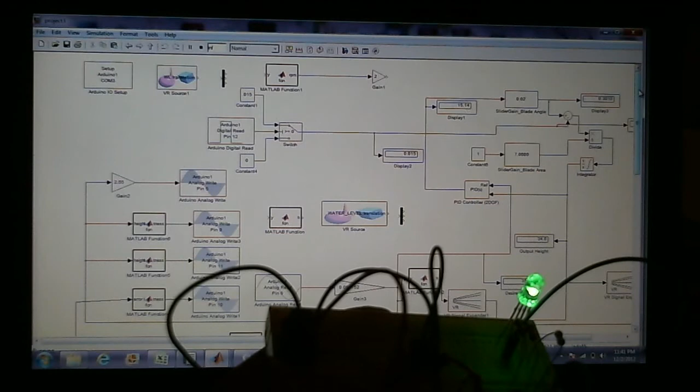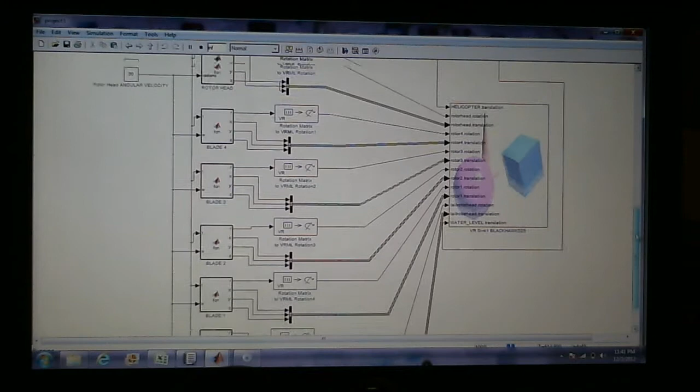Okay, here we have project 3. It's a continuation of project 2. Much of it is the same. Here we have our PID with slight modifications to it. We have our VRML world, 3D world here. That's largely unmodified. And of course we have the meat of project 3 here, which is the Arduino setup, the Arduino on the breadboard.

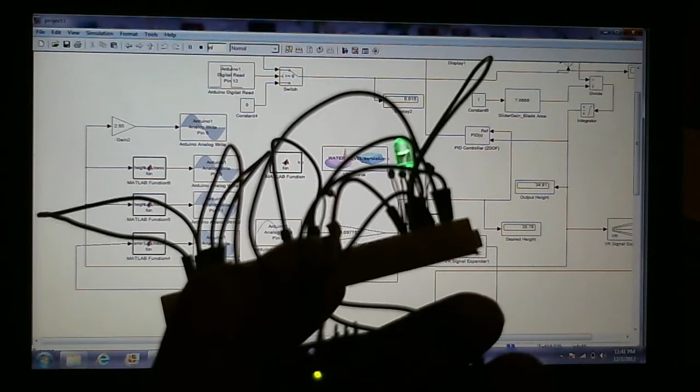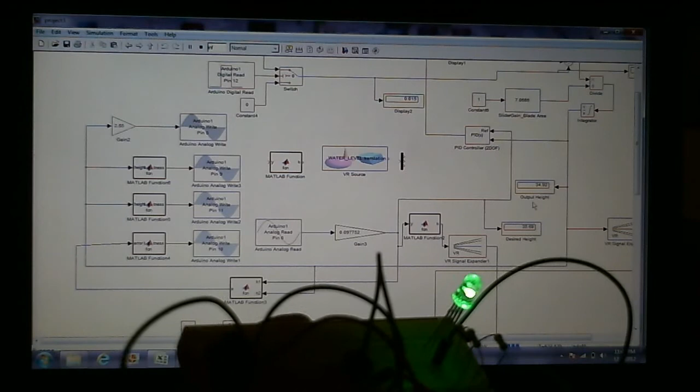So I'll start with the PID. For the PID, we added this analog read from pin 0. So we set up our Arduino with pin 0. That's an analog read, and based on that read, which is connected to this pot right here, we can go from 0 to 100. That's our height, and we have it here, desired height. And you can see right now the light is green, which means that this desired height and output height are about the same. There's a small error in it, so the less the error, the brighter the light turns. I'll show that in a moment here.

Here we have our 3 for the RGB light. We did an analog write instead of a digital write. So with this we can control the brightness of the lights instead of just being on and off. So for this one, I believe this is the error. So as it gets closer than a difference of 3 in height, it starts getting brighter and brighter green as the error gets lower.

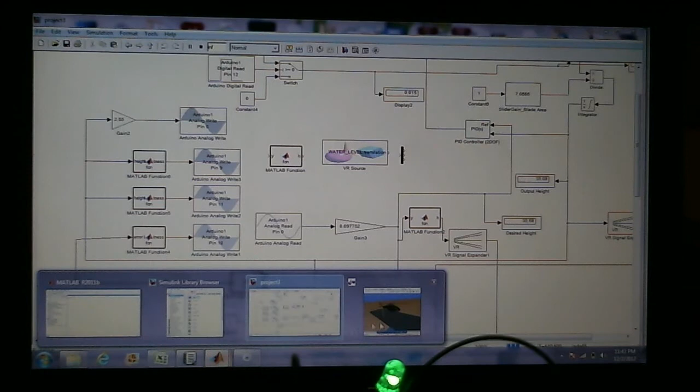The other light is red, so if it goes past 90, it turns red, and as it gets closer to 100, it gets brighter and brighter for the overflow. And for when it's critically low, when it hits 10, the light turns blue, and it gets brighter and brighter as it goes to 0. So I'm gonna show it here. Let me see. I got the helicopter going here.

So now we're gonna adjust the height. Right now it's at 35. It's pretty bright. So if I go, let's say 40, okay, we went 39. Since the error is larger than 3, the light is off. So now it's slowly getting up there. Now it's at 36. So once it gets to about 37, it's gonna light up. So now it's getting closer to the desired height, and it's getting brighter and brighter. That means that the error is decreasing. So the brighter the light is, the less the error.

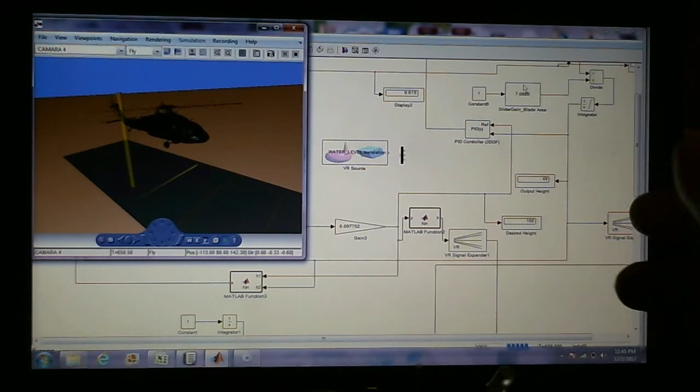So now we go to the next color, which is red, and that happens when it reaches 90. So let me put this at 90. So now it's brighter. As it gets closer to the desired height, it's getting brighter and brighter. So now when I change it, my desired height, I just put it at 100 for now. So the desired height is 100, and since the difference is more than 3 right now, it's at 47, the light is off. So we gotta wait here. It's taking a while for it to reach the height, but you can see it's going up there. If you can see the line here and the aircraft, the gap is getting bigger, so it's going up.

So now it's at 64. It takes a while for it to get up there, so we're just waiting here. I thought it went up higher than that. I don't know. Taking his time getting up there. He's getting up there slowly. 82.

Oh, this is simulating a tank being filled up with water more than what it is. A helicopter going up 100 meters, that's pretty damn slow for a helicopter.

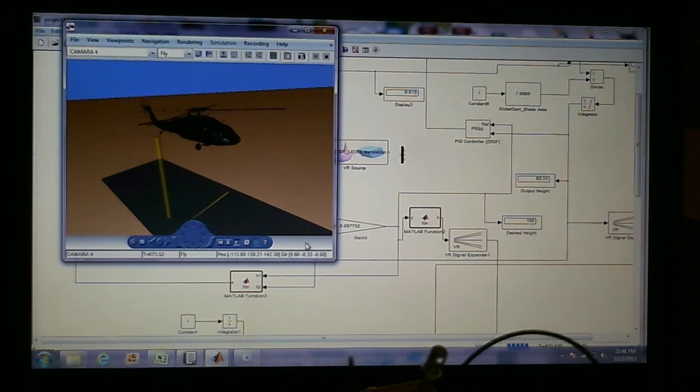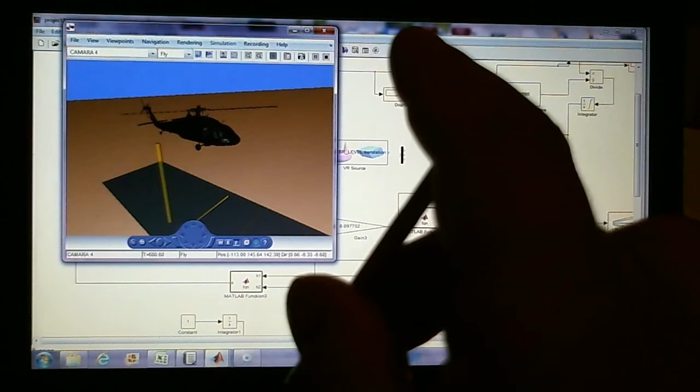Yeah, so now it hit 90. The height is 90. So above 90, it's getting brighter and brighter as it goes to 100. I'm gonna adjust this. I'll put it at 98. Actually 95. So at 95, it went green because the error got small, but it's also red because of the overflow. Yeah, so now the desired height is 92, but the output is 96. It just turned red.

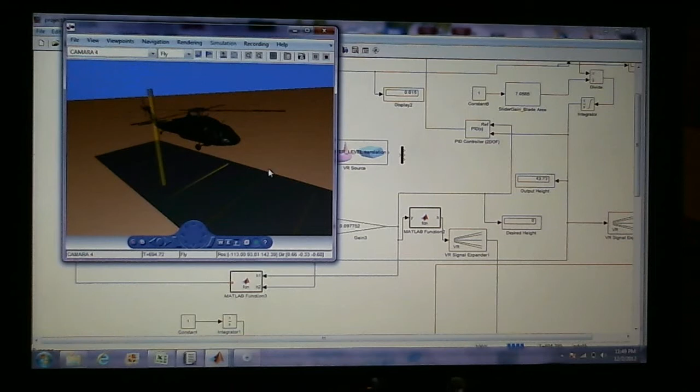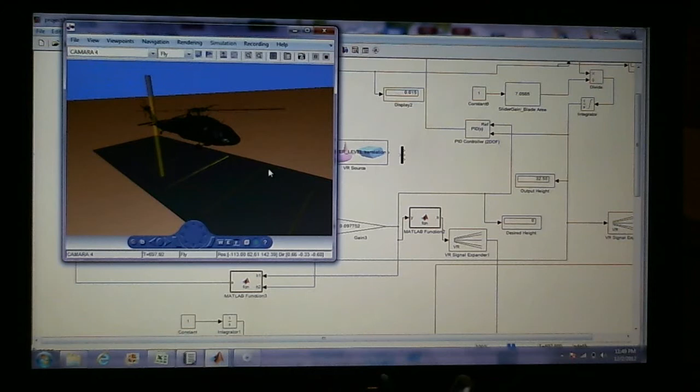And if we do it for the low level, I'm gonna turn this desired height all the way to 0. Yeah, you can see it's going down. You can tell through the bar here and here. At 75, this thing takes a while to go down. It's at 21 right now.

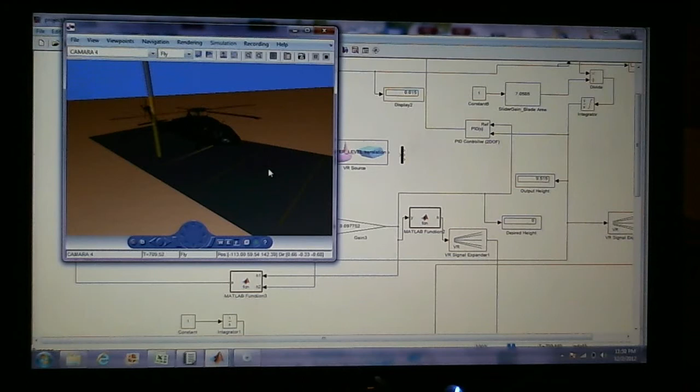So once it hits 10, it should light up blue, indicating that the level is low, or it's close to the ground in this case. So it's 11. There, it hit 10. Now it's getting lower and lower. It's going to 0, so it's getting brighter and brighter. It's gonna be the most bright when it's at 0. Since our desired height is 0, we expect it to turn green. So it should be blue and green.

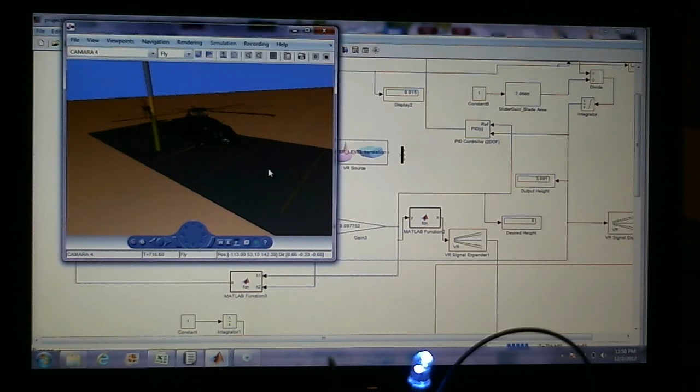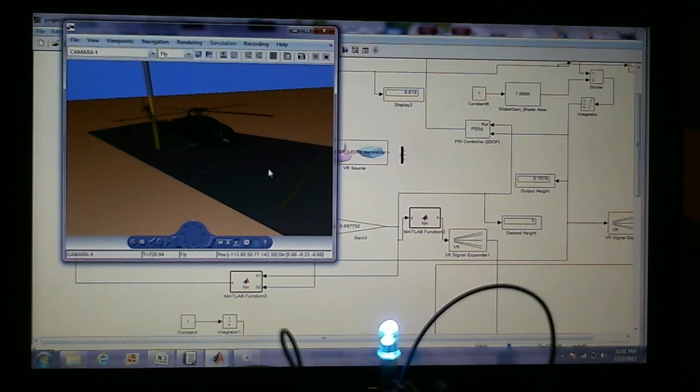4, 3. Yeah, so now we're about to be within the error. 2.5, 2.3. Yeah, so now it's blue and green. You can see it turning green, indicating that the error is low, which means that we're getting close to our desired height, and it's blue, meaning that it's low, or close to the ground in this case.

Okay, another part of the project here was implementing this switch for the outflow. So if we press this button here, that's going to trigger this switch right here and allow this to be a constant value, which is going to have an effect on the height. Let me see what else. Oh yeah, we have this analog write for the height. So the higher it gets, the brighter it gets for the red LED. That's right here. And that's project 3.